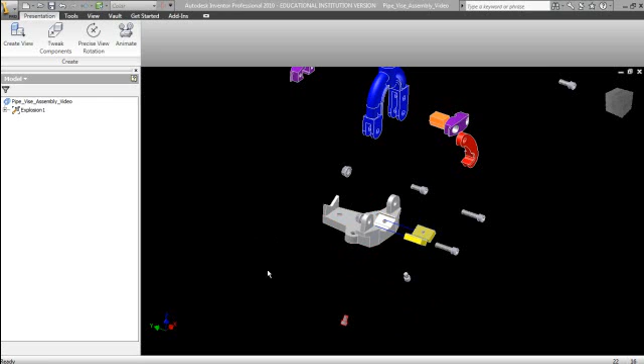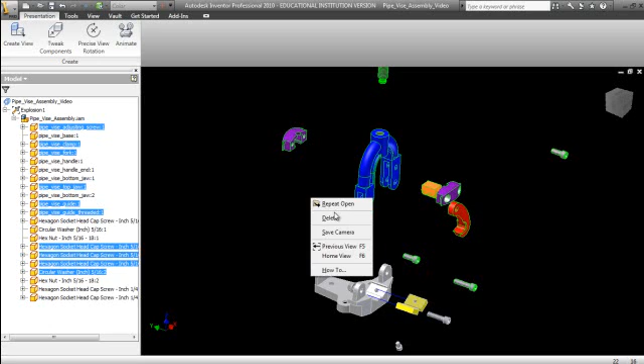and to do that, if we just highlight those parts, you can hold the shift key and highlight parts. Probably the easiest way here. And if you right click, let's right click over here. Well, I said we could do that, but apparently we can't do them all at once. We don't want to delete them, that's for sure. So I'll go ahead and just start changing the visibility.

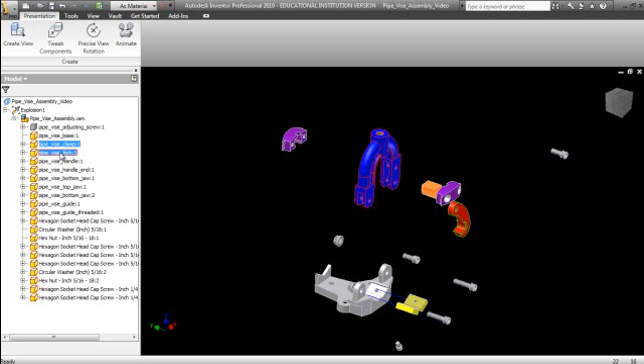Let's try one more thing. I want the base to stay. I don't want the clamp. I'm going to pick them over here and see what that does, if we can pick multiples. Yeah, I can do the visibility on that. So I want to keep the bottom jaw, but I don't want to keep the top, nor do I want to keep the guide.

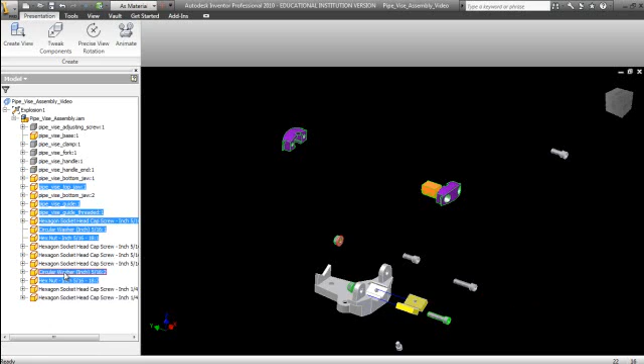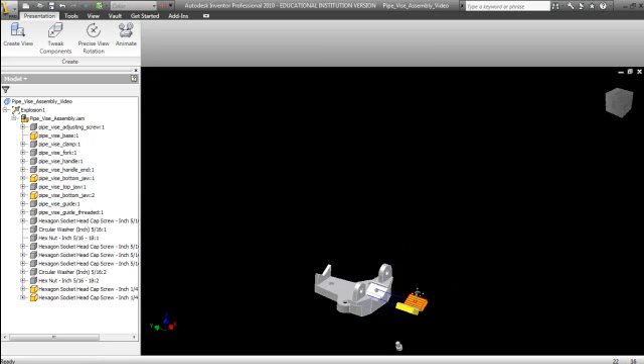We just have to make sure we don't get the wrong screws. And actually I believe those are the 1/4 inch screws, so we just want to make sure we don't get the 1/4 inch. And so now we've got those isolated, and I just want to turn those off. I don't want to get too many things going on here.

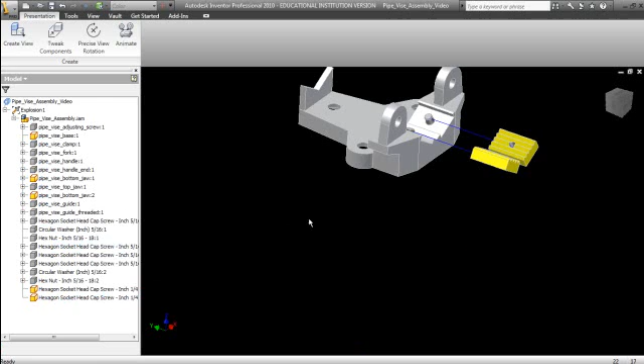So now what we're going to do is, remember we put some tweaks on these two parts. They're 6 inches, and we're going to delete those by right clicking on them and turning that off, so it went back up into its spot there. Right click there and delete that. Okay, so now we can zoom in on that a little bit. You can see there's my part.

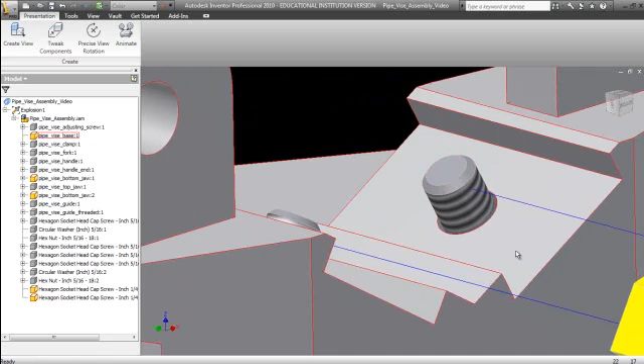Now what we've got to do is find out the distance, if you will, from the top of this to the top of this piece here, because that's where the threading starts occurring, when you get all the way through this hole. So we need to know how much travel we're going to have in this distance right here.

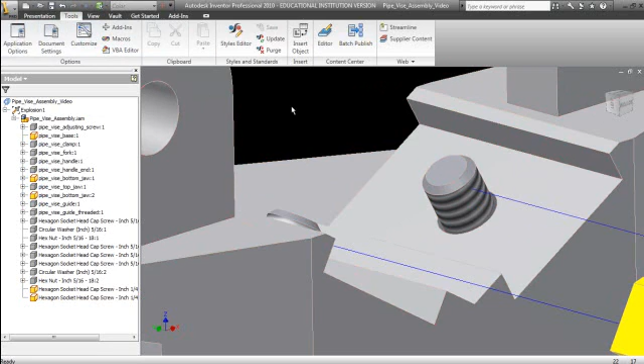So to do that, we'll go back to Tools, and well, I said we will. I want to do a measure, but I thought I could do a measure. Interesting. Got to be able to do a measure somehow. Don't have anything there. Well, if I can't measure that, then what I'm going to have to do is just stack it up, I guess.

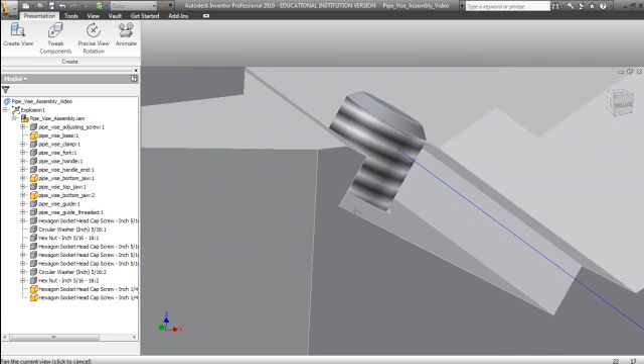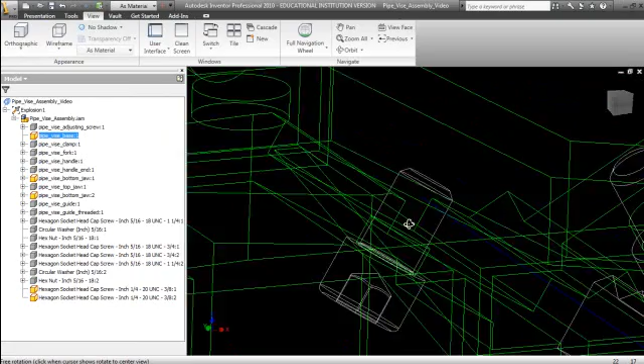Unfortunately, I thought I could do that, but what I've got to do is note that this screw, I believe, is 3/4 inch long. Oh, 3/8, I'm sorry. It's 3/8 inch long, and the thickness, if you will, on this piece right here. If you go back and open that up, we had to rotate this around a little bit. In fact, if we go here and hit bottom, I think that puts us right in line.

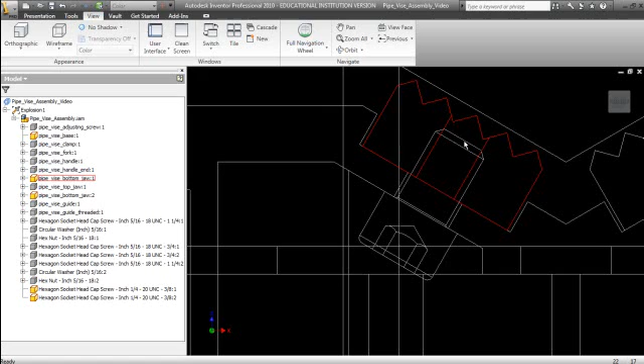But if you remember from the drawing of the base, this distance from here to here is 1/8 inch. So if we take that 1/8 inch off of this 3/8, that means the distance from here down to here is 1/4 inch. So that's how far we have to make our first tweak. So we'll turn that shading back on. So we have to make that first tweak 1/4 inch. Let's see, we might be able to do that from right here.

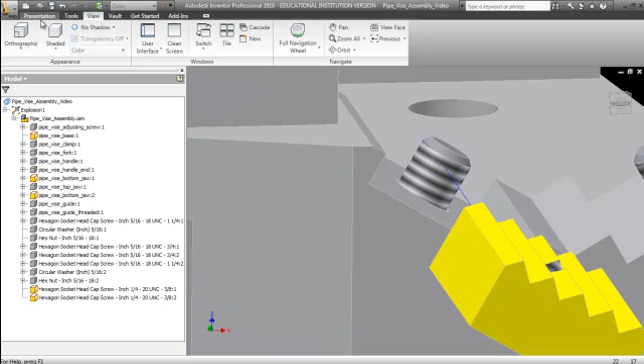Okay, so let's go to the tweaks again. We're going to grab that right on that top face and drag it down, and that's negative 0.25. So that's right where it would start to make its transition into this piece. Okay, then I'm going to take that same thing and do another tweak. This time I'm going to do a rotation.

Now, I guess before we do that, let's close that and talk about that. That thing has to move 1/4 inch into the piece, doesn't it? And it says that it's a 1/4-20 thread. So it's going to move 1 divided by 20 with each turn of that screw. That's called the lead.

You always take 1, which is an inch, divided by the number of threads, which is 20 in this case, and that tells you every time you turn that screw 1 complete turn, it's going to move that distance. So if we call our calculator up and we take 1 divided by 20, it's going to move 50 thousandths of an inch every time we turn that screw. Well, we know we have to move it 1/4 of an inch, don't we? So let's take 0.25 as the quarter divided by the 50 thousandths.

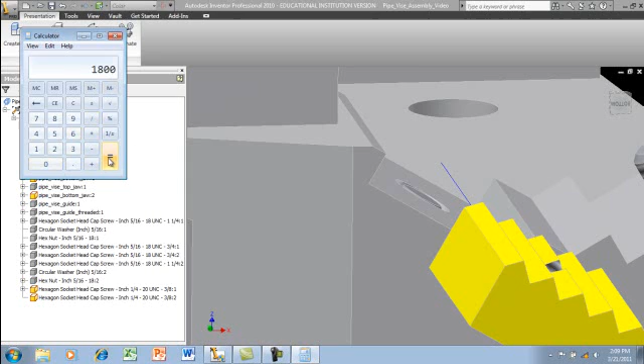It says that it's going to have to make 5 complete turns to get that distance in there. So again, we take the 1/4 of an inch divided by 0.05, which was what we found out the lead was, and you find out that it takes 5 turns to get that thing in there. Now that's 5 turns, so we have to go times 360 degrees is a turn, right? So 1800 degrees is what we need to make this thing rotate.

So if we go in and do a tweak and we grab that axis there, and it has to be through the center of that part now. And now instead of doing just a transformation along an axis, we're going to do a transformation about the axis. Now you can go ahead and put in what was our number there.

Can't remember right offhand now. It's part of getting old.

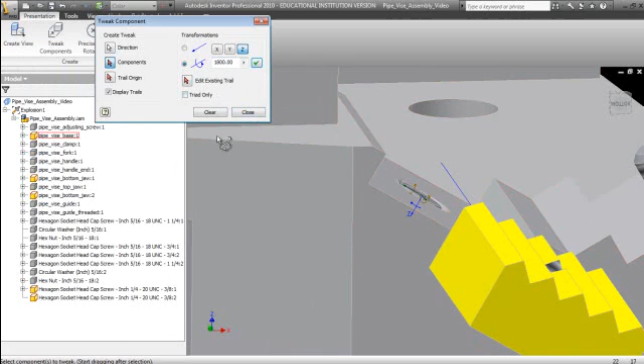1800 degrees. You can go ahead and type in 1800 degrees. If it's the wrong rotation, we'll just have to add a negative sign to it. So now what we can do is let's rotate this around and make sure it's rotating the correct direction. To do that, we'll go to animate, and the animation should show you that those are the first 2 things that are happening there. There's our 1800 degrees and there's our 1/4 inch move.

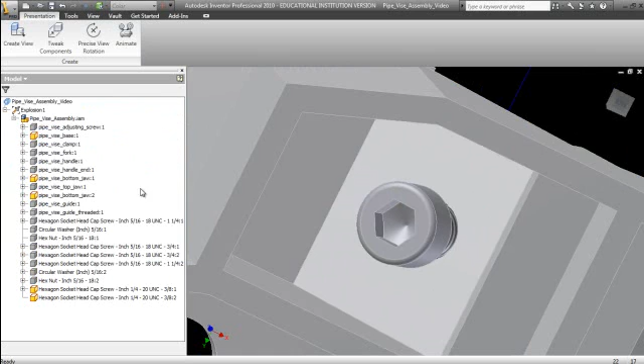So if I hit that, oh shoot, I got the wrong part. The tweak was on the wrong piece. So let's go back to the base here and note there's my tweak of 1800 degrees. Delete that. That's why that thing was rotating like it was. So I had it highlighted, and if you have it highlighted, it's going to pick that for the tweak. So let's go back and try it again.

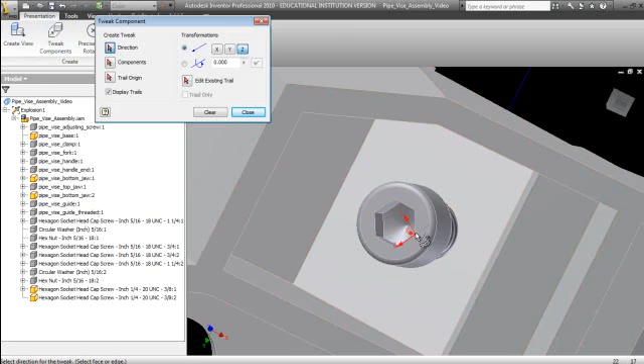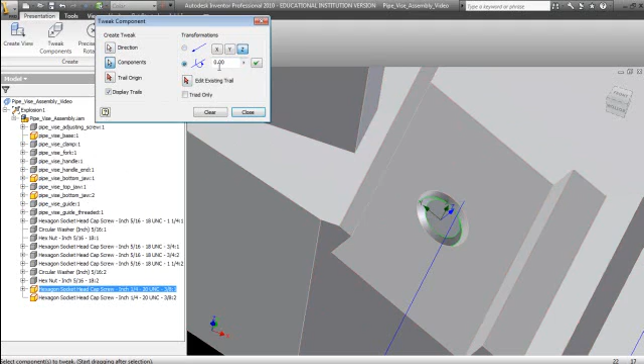I'm going to rotate this back around. I want on that axis right there, if it'll snap to it. Okay. The component now I want is just that piece right there. Then I'm going to go here, 1800, about that axis, accept it, and then I'll close. Now let's see what it's going to look like now.

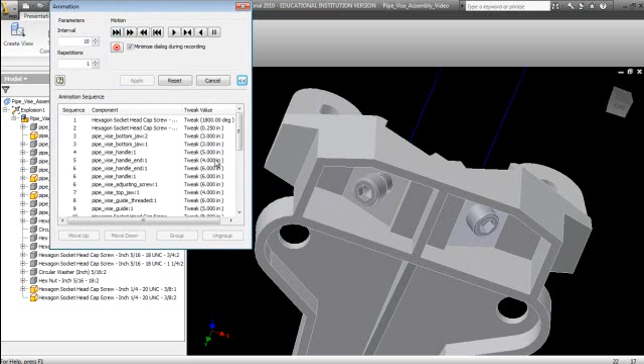So if I animate, there's my tweak. Now, one thing we could do here real quick is we could check over here and see that there's my 1800, so I know we're going to be in the right spot. Now it's just a matter of if it's going to turn the right direction. And now notice that thing moves so fast that we couldn't see the rotation. That's too fast. So we're going to slow this down a little bit. Let's slow it down to 25 and see what that does. Hit apply. And now let's try it.

And that would appear it's going the wrong way, wouldn't it? So let's change that to 50 and see what it does. Apply. Okay, and that's still pretty fast, isn't it? Let's set it at 100 once. It sure looks to me like that's backwards. So in that case, we're going to go back in there, change that to negative 1800. Make sure you hit enter and it accepts it.

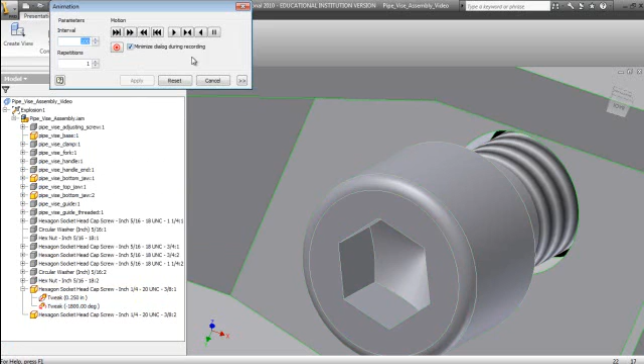That looks a little better. Now, here's the next problem. It's turning and then it goes and feeds down into the piece, and I'm still questioning that 1800, to tell you the truth. But what I want to do is take this tweak for the rotation, hold the control key down on your keyboard and hit that 1/4 inch of movement, and now once you highlight both of those, note that the group button can be selected.

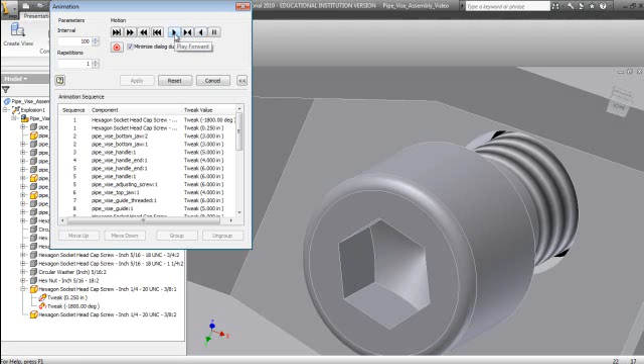So I'm going to hit group and apply, and both of those are connected now, so that when I do my forward, you can see that that thing is turning in just like it should, and it locks in there. Boom, done. Then it goes about doing its business on whatever else you've got going on.

Okay, now, you couldn't have those screws go in before the jaw goes in, could you? So I guess we better go in there then and move this first group down past those jaws and hit apply, and now we'll play it and you'll see that the 2 jaw pieces are coming into place. Now this is already in there for some, oh well, I deleted the constraints, didn't I? And then I put it in one place too shallow.

Let's see, let's reset that, and we'll go in and move this up 1. Apply. Now we'll play it. It's going to do its thing here. Now the hex screw should come in next. And there it comes in.

And then it's going to do the rest of its thing. So now what we want to do is do the same type of action over on the other side here. So let's tweak, and we'll grab that cylinder and we're dragging that out a quarter inch.

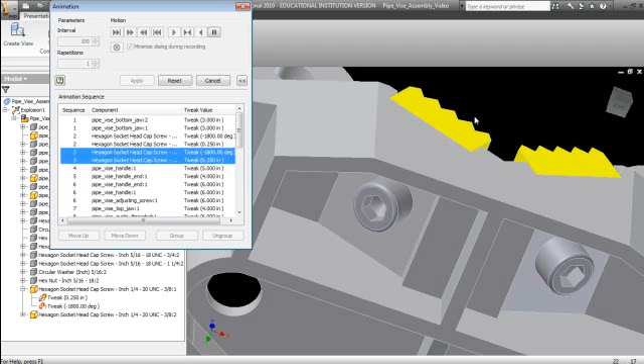So if you go in there though and you calculate, you've got 1 and you've got 20 threads per inch, that's 50 thousandths. Okay, and we're only going to go, that's probably where I screwed up, we're only going to go a quarter inch, which is a quarter of...

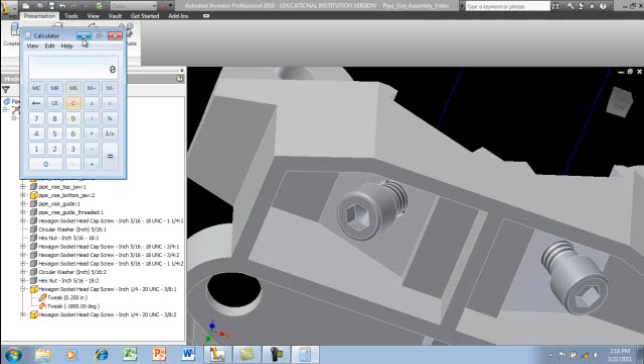Let's see, every turn is 50 thousandths of an inch, and we need to go a quarter of an inch. So I think that's going to be, well, if we got a quarter of an inch divided by 50 thousandths, that would take 5 turns to get that taken care of. So 5 turns is 360 times 5. That's 1800, no matter how you look at it.

So that's what we would do for that. Now then what I would do also is I would pull these out so that they don't get involved with anything here. Keep them similar to what we had before. And I might grab this one, drag it out, and make it 6 inches as well.

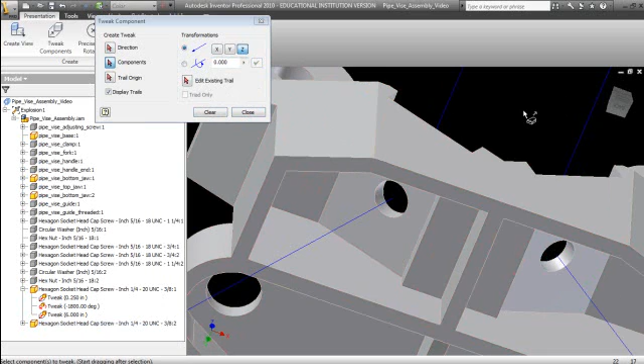Now then, when you animate, again, those are going to be out in front, so you have to be careful on that. So when you play it, those go into position. You know, I'm not so sure we don't want to have the jaws go in before that. As you can see, it's going to sit there and wait.

And we could group those two together so that they both go in at the same time, just like the jaws do there, the yellow jaws you see. So I think we want to, at least, if we don't group those together, we at least want to put those down in the order somehow here.

I might have gone too far. And then we can play it back again. So there it's putting in the jaws.

Unfortunately, we've got this turned down so slow so that we can make sure that those screws are turning in the right order. But it's going to put both of those in. And I think what we might want to do on those, if we wanted it to be more realistic, is when it brings one of those in, we'll just start the turning process.

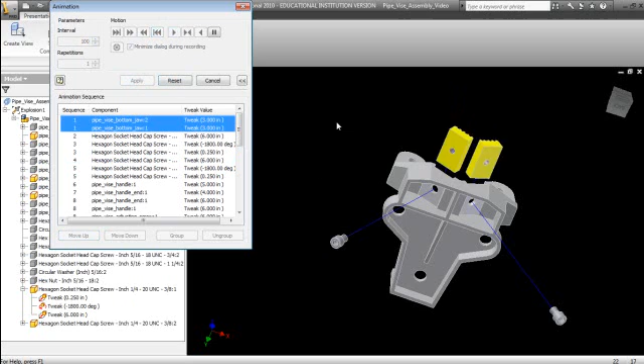Let's see what happens. One nice thing about it, you can always just play it, make sure that that's what you want to happen. And you can just move these things around where you need to. Just caution you that sometimes you can get yourself so out of whack, so make sure that you save them periodically so that if you have to go back, you can pick one out.

And so there you go. That's more like it. That's kind of realistic there, isn't it? That makes this a lot easier to be able to see how things go together.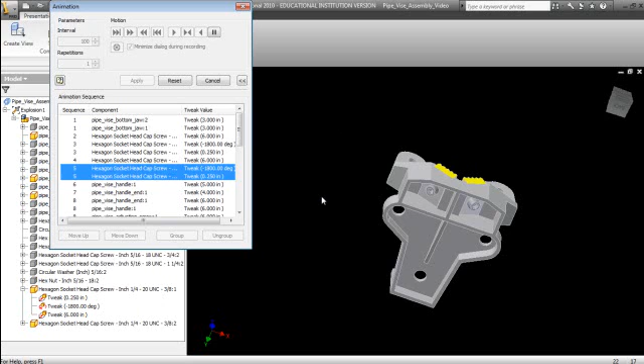So what I'm going to do is we'll stop the video on that, and then I'm going to go back and show you some more of these pieces. We'll bring some of these back up, and I think we've got some other nuts and bolts and things on that all between the fork and the base itself. So we got this piece right here. We've got bolts that are attached there. So we want to make sure when they come into place, they'll come in and do their turning thing as well. So that'll be in another video.